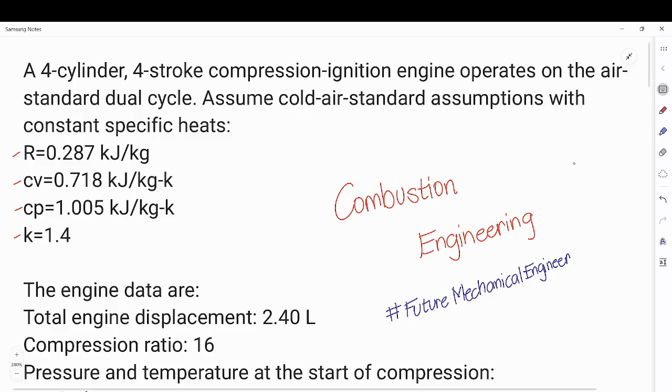Okay. So we have a four-cylinder, four-stroke. So the engine data are we have here the total engine displacement 2.4 liters. And the compression ratio RK, this is our RK, 16. Pressure and temperature at the start of the compression, we have here our P1, which is 95 kilopascal, and our T1 is 35 degrees Celsius.

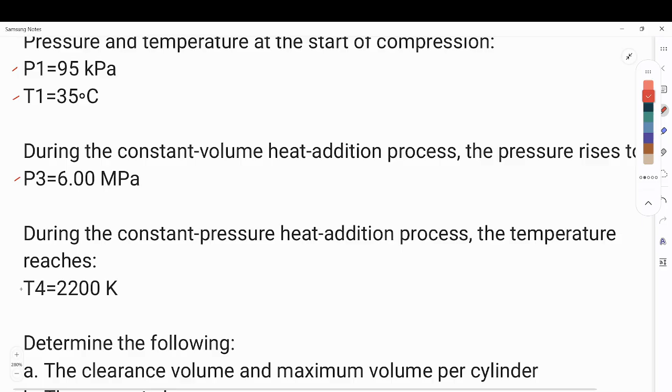And then, during the constant volume heat addition process, the pressure rises to P3, 6 megapascal. And then, during the constant pressure heat addition process, the temperature reaches our T4, which is 2,200 Kelvin. Okay, now that we have our data, basahin natin anong hinahanap. Hinahanap po dyan lahat. We are asked to determine the following.

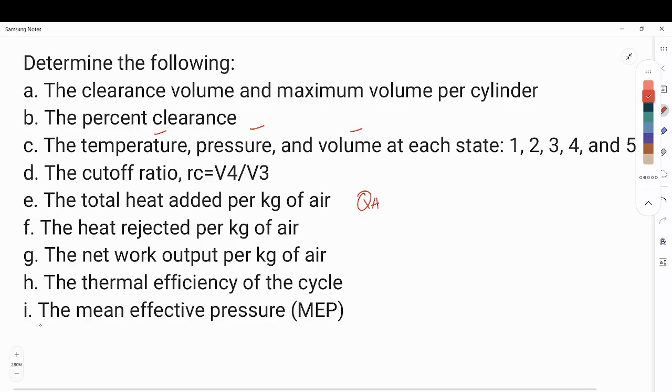A, the clearance volume and the maximum volume per cylinder. And B, the percent clearance. C, the temperature, pressure, and volume at each state. Then we are also asked to find the cutoff ratio, V4 over V3. Then E is the total heat added per kilogram of air, which is our QA. And then we have the heat rejected per kilogram of air. G is the net work output per kilogram of air. H is the thermal efficiency of the cycle. And then finally, letter I is the mean effective pressure or the MEP.

Okay, so let's start answering this problem. And the first step in answering any problem is to write down our given data. So what are we given? Anong meron tayo? So again, it is stated we have a four-cylinder. Meron daw tayong makina, compression ignition engine. Apat yung cylinder niya. So it is also said that it is a four-stroke. So one cycle requires 4 strokes.

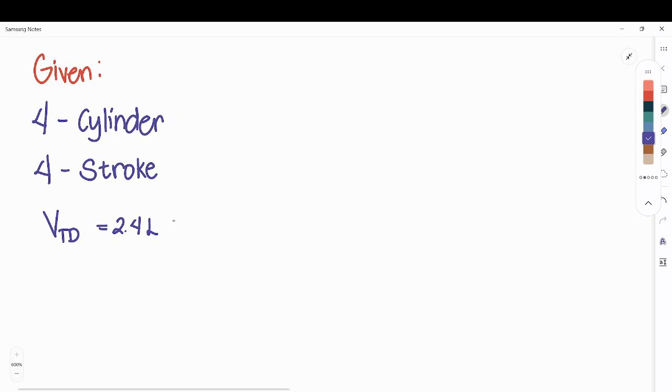And then may binigay po doon na volume displacement, which in this case is the total volume displaced. Kasi sa apat na cylinder na yon, may bawat cylinder may volume na nadi-displace, and pag kinombine mo yung displaced volume na bawat cylinder, you will arrive with 2.4 liters. Or in cubic meters, just divide that by 1,000. So that will be 0.0024 cubic meters. And then we also have our compression ratio RK is 16.

Our P1 is 95 kilopascal. Our temperature 1 is 35 degrees Celsius. And then just make it to Kelvin, 308 Kelvin. And then our T4. Anong T4 natin? T4 is equal to 2,200 Kelvin. And then may binigay ding P3, which is 6 megapascal, or gawin na natin kilopascal for unit uniformity. So, yan yung mga given natin.

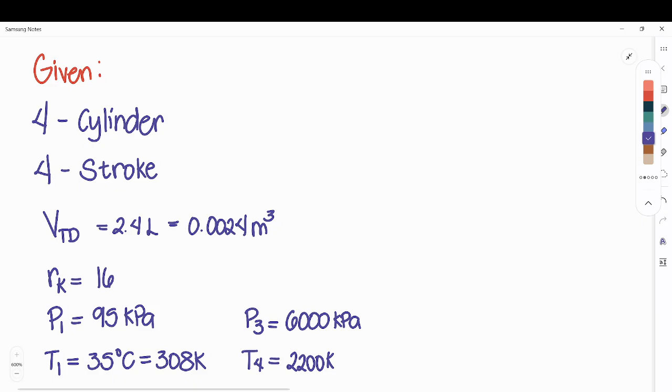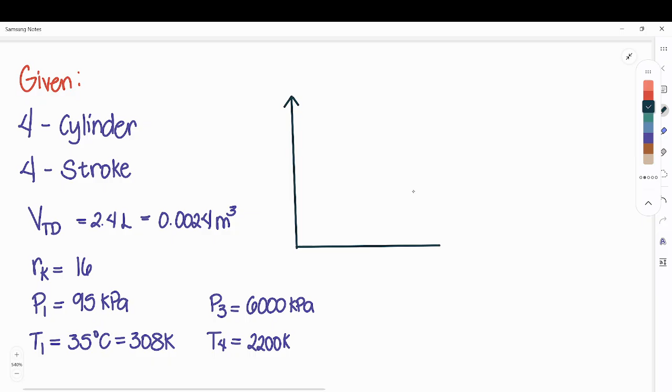And our cycle, again, is a dual cycle. So, ano nga ba ang dual cycle? Let's just recall. In order to solve this problem, you must have a comprehensive understanding of the dual cycle. So, para hindi ka maligaw, before solving a cycle problem, you can draw its PV diagram kasi doon mas madaling ma-visualize yung nangyayari sa bawat parts. So, let's draw. Sa dual cycle, we have an isentropic compression and then isometric heat addition. Tapos may isa pa siyang heat addition which is isobaric. And then it further expands to an isentropic expansion. Tapos isometric heat rejection.

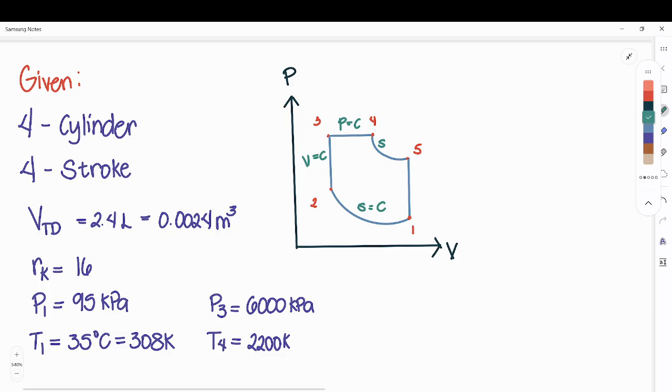So, this is your point 1. Here is your point 2. Dito naman is point 3. Dito is point 4. And dito is point 5. Again, isentropic compression, your entropy is constant. Dito naman your volume is constant. From process 3 to 4, your pressure is constant. And then 4 to 5, again, entropy is constant. And finally, 5 to 1, your volume is constant kasi isometric heat rejection.

Tapos, para hindi ka malito, i-drawing mo na din na from 1 to 2, anong ratio ang mahalaga dyan? You have here your compression ratio RK. Next, from 2 to 3, your important ratio is RP. And from 3 to 4, ang mahalaga dyan is si cutoff ratio. Para hindi ka maligaw kung saan makukuha yung ratio if pinapahanap or gusto mong gamitin.

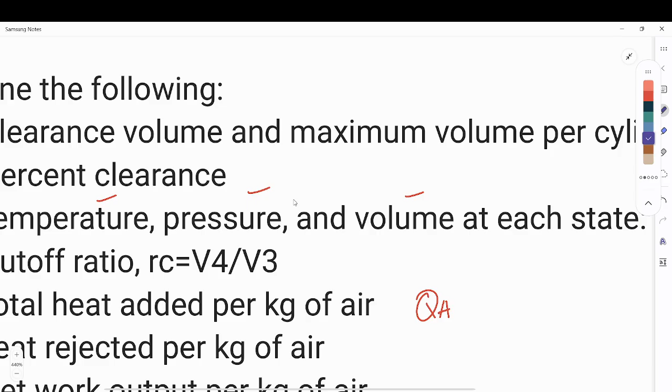So, let's proceed. First, pinapahanap dito is the clearance volume and the maximum volume per cylinder. So, the clearance volume is the smallest volume formed in the cylinder. At sinabi pala doon, saan yun?

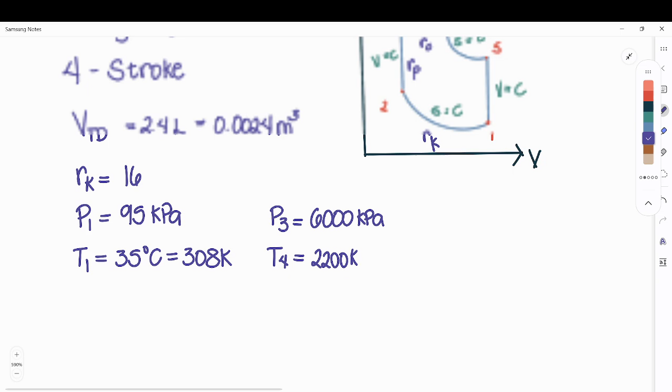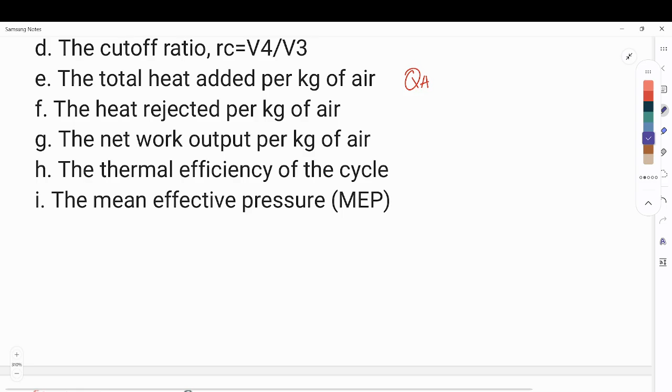Clearance volume and maximum volume per cylinder. So, per cylinder ang hinahanap. Take note of that. Ang given sa atin ay total. We're given the total volume displacement sa buong engine.

So, para makuha natin yung per cylinder, we can say that the total displaced volume is equal to the number of cylinder times the volume displaced per cylinder. So, hinahanap natin si VD per cylinder or the volume swept per cylinder. So, madali lang, divide mo lang yung total ng number of cylinder. So, your volume displaced per cylinder is the total over the number of cylinder.

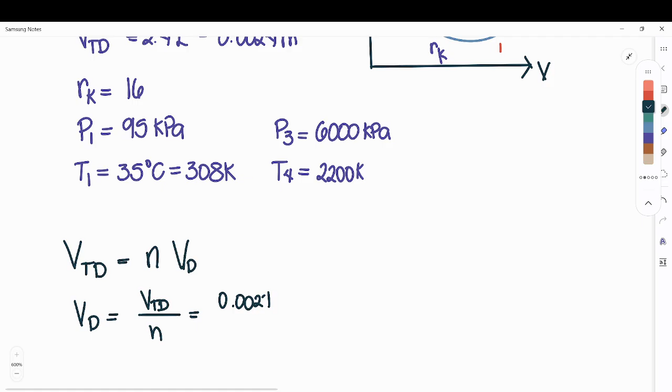So, 0.0024 cubic meters over, again, we have a 4-cylinder engine. 4 yung cylinder ng engine natin. So, pag dinivide natin yan by 4, you'll have 0.0006 cubic meters. Ano po yan, sir? Ano yung volume na yan? Again, that is the swept volume per cylinder.

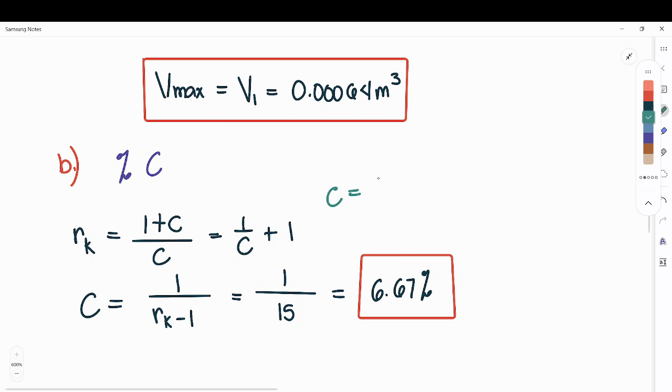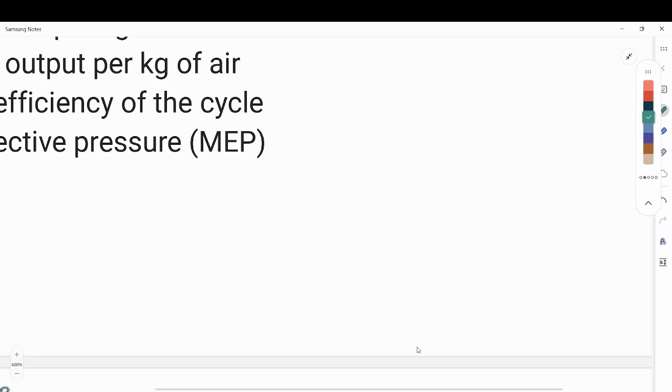Okay na tayo sa clearance. Percent clearance. Okay. Pwede mo din kunin si percent clearance in terms of the volume clearance over the swept volume. Ganito. VC over VS. Yan. Dapat pareho sila ng answer. Okay. Now, let's proceed with anong sunod? Yan, ito na yung mahabang part. Pag nakuha natin si letter C, shoot na lahat yung D, E, F, G, H, I.

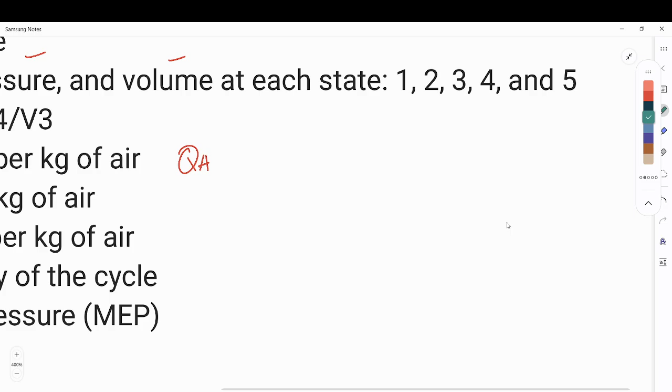Sa letter C, we're asked to find the temperature, pressure, and volume at each state. 1, 2, 3, 4, 5. Hanapin mo yung volume, pressure, at temperature sa 5 states or points na yon. So, let's proceed. Gawin natin si letter C. PVT at each state. P, V, and T. So, maganda dito para hindi ka mahirapan at organized yung solution mo. Ang ginagawa ko, you find the PVT for each process. 1 to 2, 2 to 3, and so on and so forth.

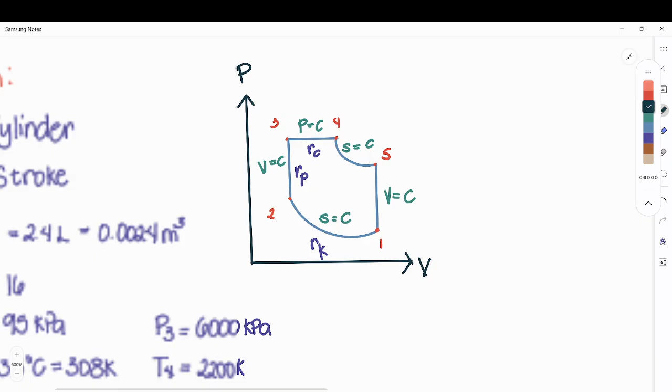So, simply, substitute your values. Our T1 is equal to 308 Kelvin and our compression ratio is 16. So, salpak. 308 Kelvin times 16 raised to, our K is 1.4, so minus 1, this will become 0.4. Okay. So, our T2 is equal to, press that to your calculator, you will have 933.6814 Kelvin.

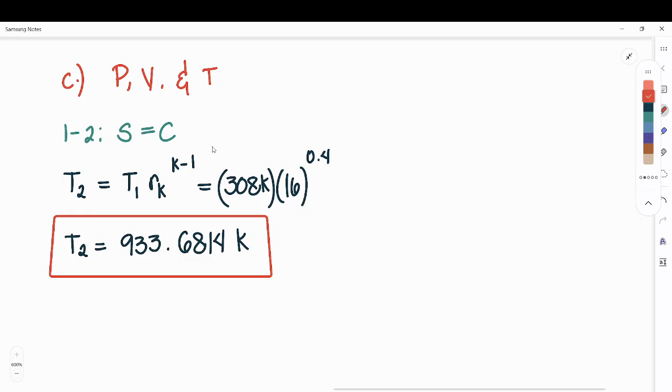So, ang gawin nyo, once you arrive with temperature, store nyo na sa calculator nyo kasi this will be very helpful. It's very important when we solve for the heat rejection, the heat added, and the work net. So, store mo na yan sa calculator mo sa mga letters, para hindi ka malito. Kayo nang bahala kung saan letter. Basta nakastore yan. Okay, so let's proceed with solving for the P2. Kasi we are given P1.

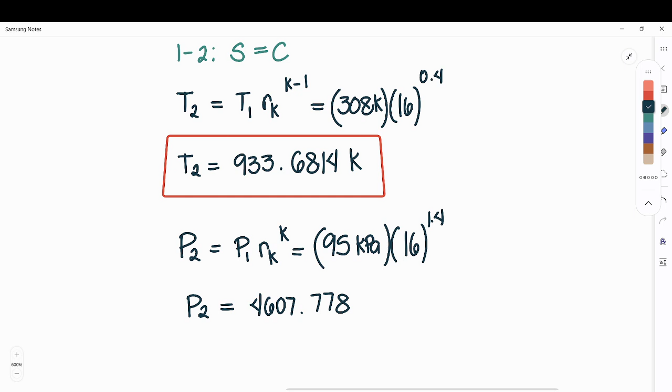So, relationship naman ng P2 is simply P1 times RK raised to K. Kasi inversely proportional yung volume at pressure. So, anong P1 natin? 95 kilopascal. Salpak lang. 95 kilopascal times our compression ratio 16 raised to 1.4. So, our P2, pag pinindot sa calcu, ingat sa pagpindot, you'll have 4607.7784 kilopascal. Again, this is your P2. Pwedeng i-store mo na to ulit kasi baka kailangan mong gamitin.

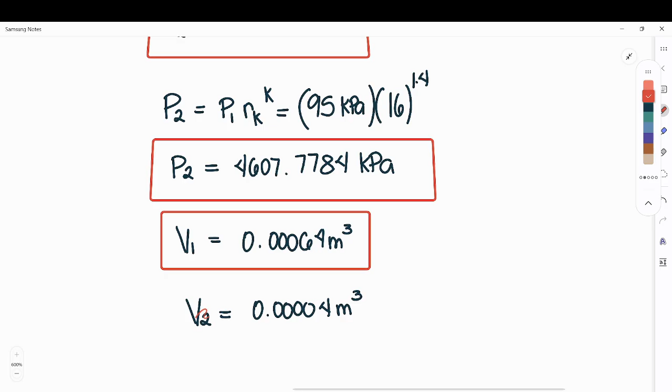Okay. So, meron na tayong pressure, temperature, and yung V1 nakuha na natin. Diba our V1 is the maximum volume na nakuha natin kanina, which is 0.00064 cubic meters. This is our volume 1. Ay, kailangan natin ng volume 2. Ang volume 2 naman is our minimum volume, yung nakuha natin, 0.00004 cubic meters. Okay na tayo sa process 1 to 2. Nakuha na natin yung dapat kunin. So, let's proceed with the next process.

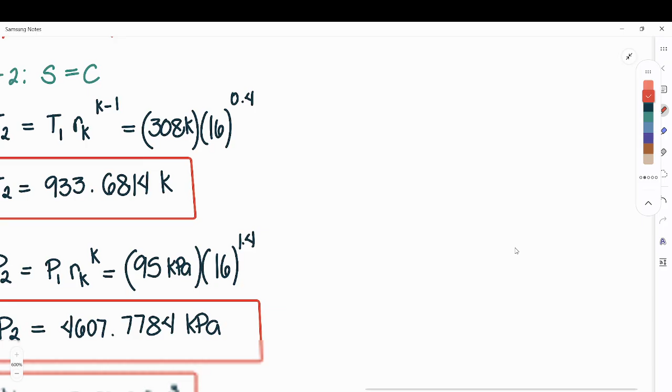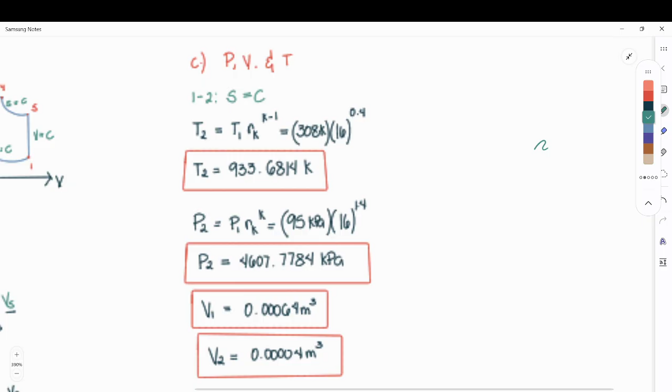Anong sunod na process? Process 2 to 3. Let's just move this aside. Ano nga yung process 2 to 3? Para hindi ka malito, balikan mo yung dinadrawing mong PV diagram. Process 2 to 3 is isometric. This is a constant volume heat addition process, meaning your volume is constant. Ano yung mga relationships ng PVT kapag volume is constant? T3 over T2 is equal to P3 over P2. So, we can solve for T3.

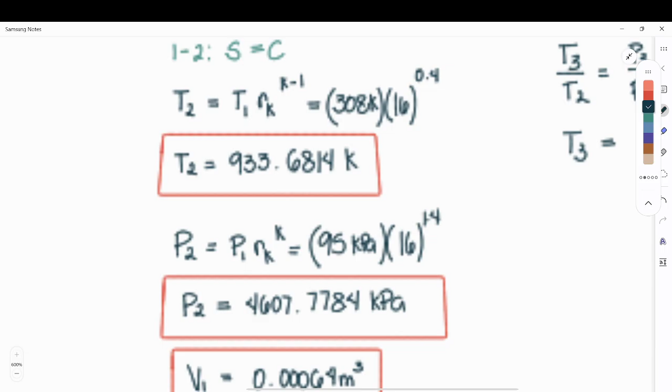Kasi, may given ditong P3. Ito, 6,000 kilopascal. Okay. So, we can solve for that kasi may P2 tayo. Ang nawawala lang is T3. So, rearranging this, we will have T2 times P3 over P2. Yan na yung ating T3. So, this is just a matter of substitution. Substitute lang natin yung given values natin.

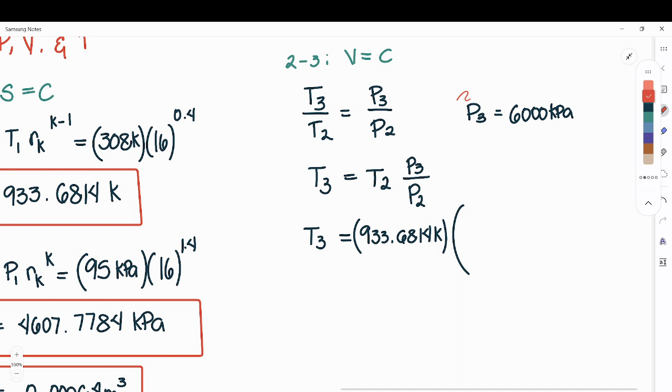Our T2, ano yung nakuha nating T2? T2 is equal to 933.6814 Kelvin times our P3. Our P3, given yung P3, which is your 6,000 kilopascal. Baksan natin para hindi tayo malito. So, 6,000 over your P2. Your pressure 2 is 4607. Dapat stored values tayo for a more accurate solution. So, pag pinindot yan sa calculator, matitira si Kelvin.

T3 is equal to, pindot, 1215.7895 Kelvin. Okay, meron na tayong T3. Madali lang si combustion. It's just a matter of following the right processes.

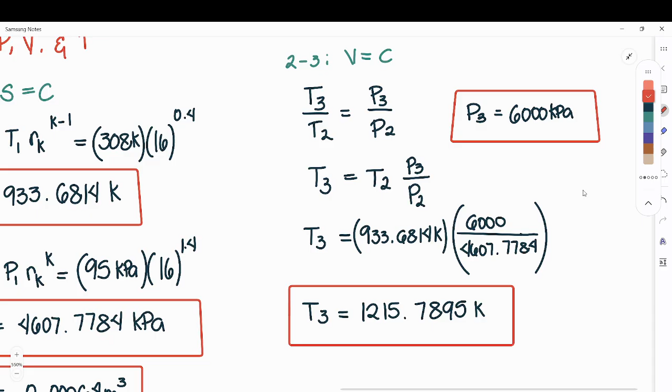Okay, meron na tayong T3, meron na tayong P3. Si V3, paano natin siya kukunin? Based from the process, it's a constant volume heat addition. Meaning, your V2 is yung V3 mo na rin. Diba? Dali lang. Your V2 is also your V3, which is equal to your minimum volume na 0.00016 cubic meters. Okay, meron na tayo sa process 2 to 3. And then, let's proceed to the next process.

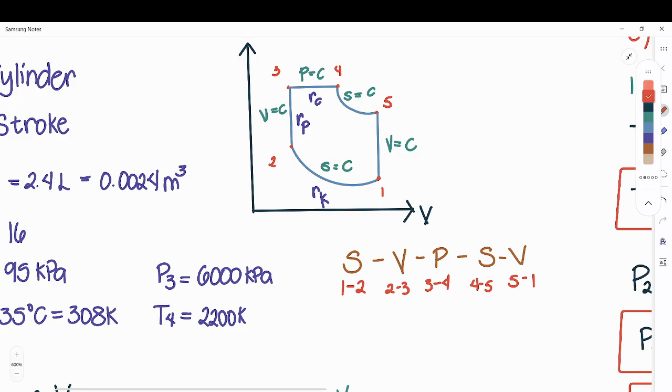Ano yung next process natin? Tapos na tayo sa 1 to 2, 2 to 3. So, punta tayo kay process 3 to 4. Tandaan natin for dual cycle, kayo bahala gumawa ng kwento nyo. Pero ang palatandaan ko dito ay sure vol. S 1 to 2, V is 2 to 3, P is 3 to 4, S is 4 to 5, and V is 5 to 1. Sure vol, pressure vol, or surely beautiful. Alright.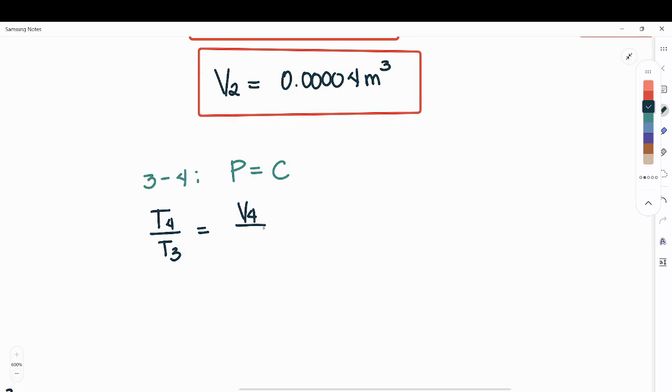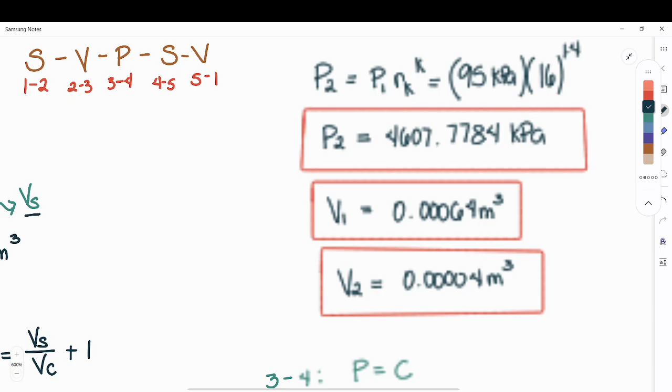So, our process 3 to 4 is isobaric, constant pressure. Lagay nyo dyan para hindi ka malito. Kapag constant pressure, your volume and temperature are directly proportional. This is V4 over V3. Meron tayong given T4, 2200 Kelvin. Our T4 is equal to 2,200 Kelvin, box mo na agad yan kasi hinahanap yan sa problem, although given.

So, we are looking for V4. V4 will become V3 times T4 over T3. And again, it's a matter of substitution. Our V3 is also equal to our V2, which is 0.00004 cubic meters. Our T4 is given, 2,200 Kelvin, all over our temperature 3, nakuha natin kanina, dapat naka-shift store yan, 1215.7895.

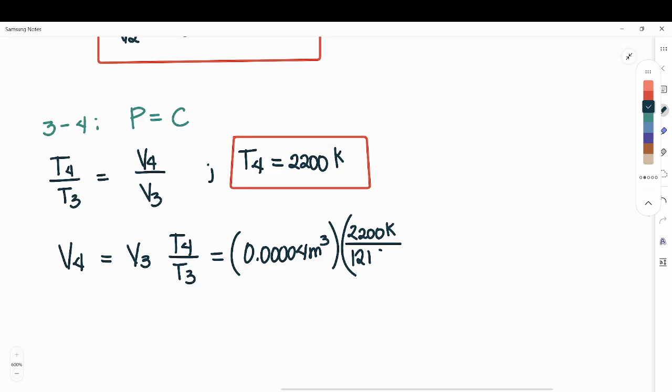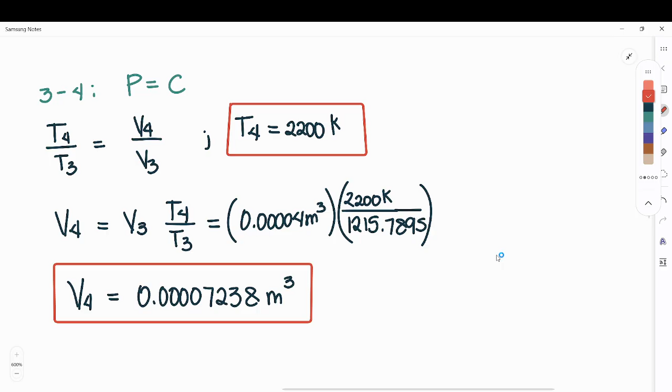Pag pinindot natin sa calculator, V4 is equal to 0.00007238 cubic meters. Shift store nyo na ulit yan kasi magiging useful mamaya. And then, ano yung pressure natin? Since this is an isobaric process, constant pressure heat addition, your P4 is also your P3, which is equal to 6,000 kilopascal. And this is the maximum pressure in this cycle.

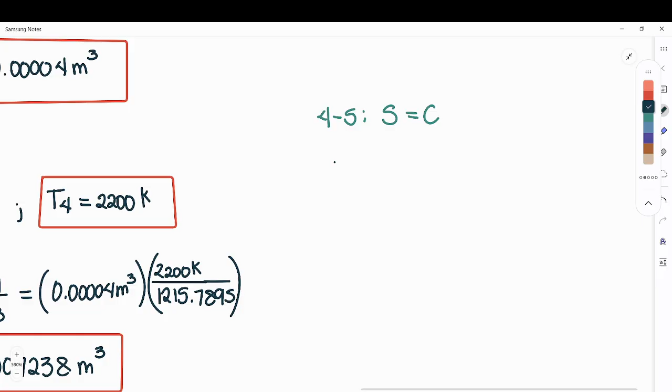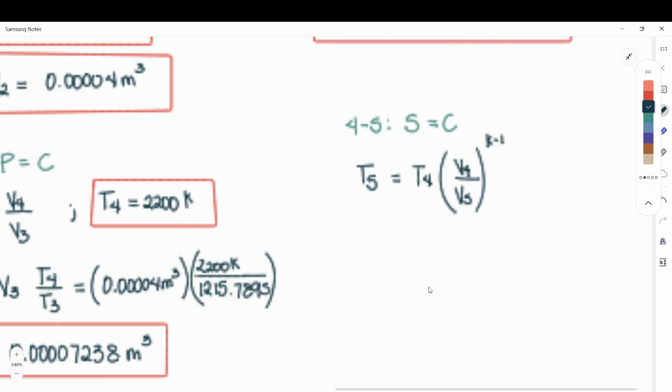Meron naman tayong V1, meron tayong V4, meron din tayong T4. Makukuha na natin si T5. So, substituting, our T4 is 2200 Kelvin. Our V4, yung nakuha natin kanina, 0.00007238, dapat nakastore. Then, our V1 is the maximum volume, 0.00064. Tama ba? Ano nga yung V1 natin? Where is it?

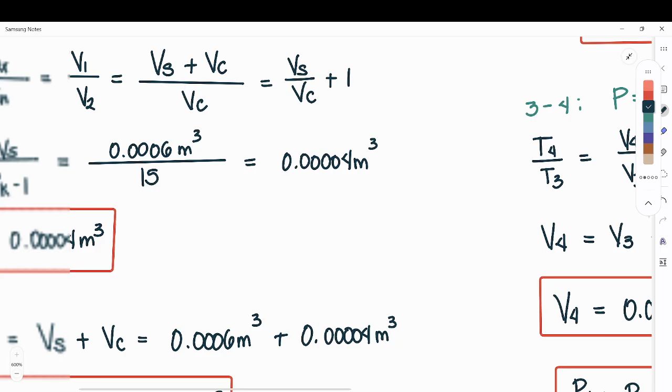Tatlong 0 pala yun siya. Ingatan nyo. 0.00064. Tama ba? Tatlong 0 yun?

Yeah, tatlo, okay. So raised to k minus 1, this will become 0.4 kasi 1.4 minus 1. So pressing that into your calculator, you will arrive with, what's the answer? 2200 times, yan yung volume natin, raised to 0.4, this will become 920.0267. Again, all values must be stored.

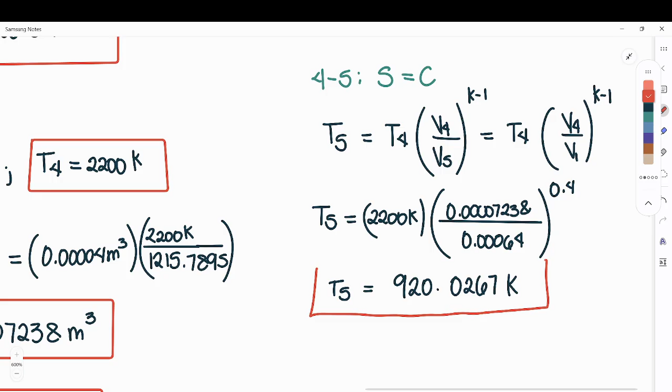This is Kelvin. Tapos meron na tayong V5 kasi nga it's also equal to our V1, which is the maximum volume. So sulat na natin, our V1, V5 pala is equal to V1, which is 0.00064. Tapos wala na lang is pressure 5.

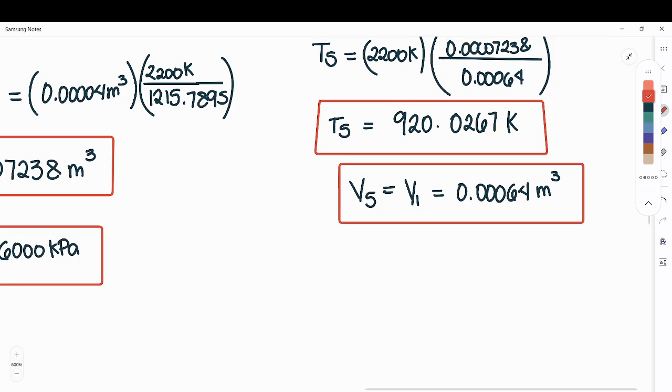Tapos shoot na tayo sa letter C. Makukuha na natin lahat, okay, let's proceed. So the relationship naman ng pressure and the volume kapag isentropic is ganito lang.

Yung P5 over P4 is equal to V4 over V5 raised to K. So ayusin natin, itaas na natin yung P4 para diretso na. So P5 is equal to P4 times V4 over V5 raised to K lang.

Yeah, so substitute lang ulit. So our P5, ang P4 natin is, ano yung P4 natin? Where's our P4 is equal to our P3 na 6,000. So pindutin natin 6,000 kilopascal.

Okay, our V4 is yung mahaba na may 7238, lang 0 yun, 4, 0 point, check natin. Yeah, 7238 over our V5 na equal sa V1, 0.00064

raised to K lang, kasi pressure at volume yan. So P5, pag pinindot, is equal to 283.7745 kilo Pascal. Yeah, okay na tayo.

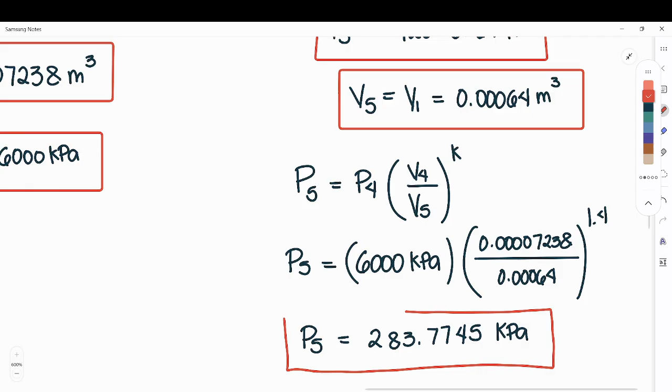Nakuha na natin lahat ng pressure. Yan, triangle - lahat ng pressure, volume, and temperature. Mag-box. Wait, pressure, volume, and temperature for each state, each point, points 1, 2, 3, 4, 5. Okay, ngayon nakuha na natin yan. What's next? Okay na tayo dito sa letter C. Okay na tayo dito, dito, and dito.

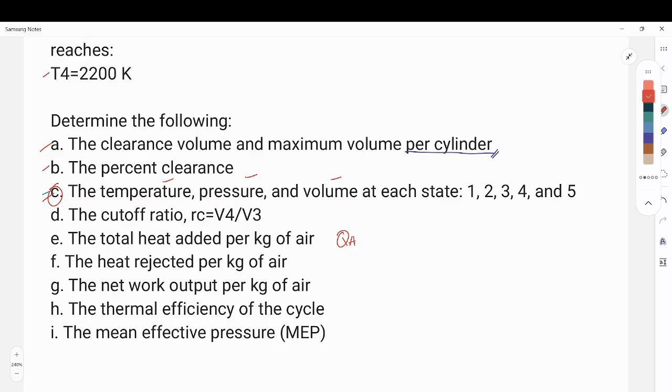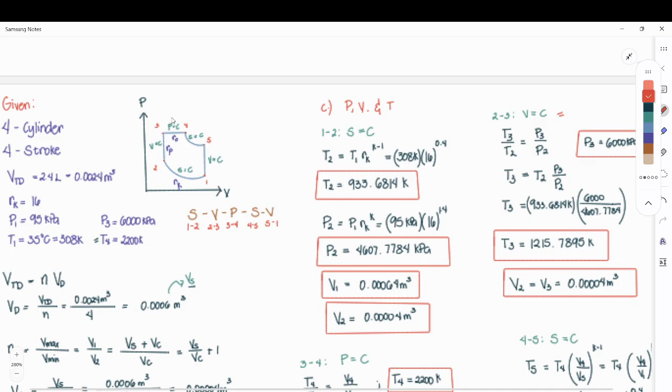Then next is the cutoff ratio, V4 over V3. Kayo na ang bahalang kumuha ng cutoff ratio. Madali lang yan, kasi it's simply V4 over V3. Dito lang yun, here, sa points 3 to 4, dito mo kukunin yung cutoff ratio. So you can handle that, just divide yung nakuha nating V4 sa V3.

V3 nating nakuha. So this will become 0.00007238 divide 0.00004 cubic meters. So yun yung RC natin.

So next pala, we need to find the total heat added per kilogram of air. So let's proceed with solving for the total heat added. Okay, the total heat added. Let's solve for the total heat added.

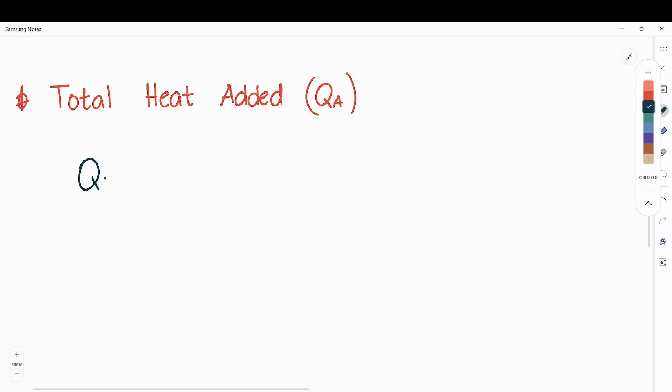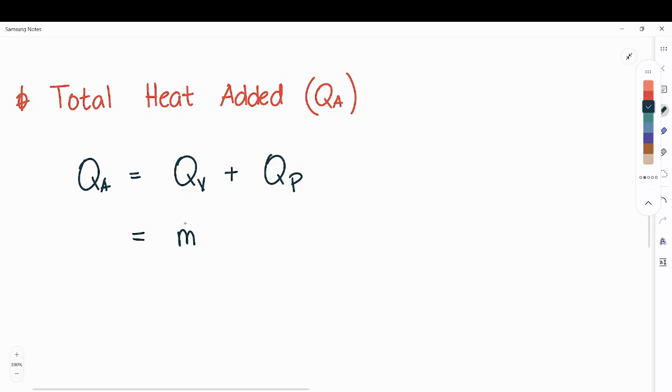QA. Okay, what is the formula for the total heat added? Again, for a dual cycle, dalawa yung nagiging heat addition process natin, which is an isometric heat addition and isobaric heat addition. So simply add lang natin. So our QA is yung heat addition sa constant volume plus heat addition sa constant pressure.

So this will become, ay, nakalagay pala doon, per kilogram ba yun? Yeah, per kilogram of air. So yung maliit na q. So we're looking for our QA, heat added sa constant volume plus heat added sa constant pressure. So this will become CV

sa nangyari tong constant volume heat addition sa process 2 to 3. So this is T3 minus T2 plus heat addition sa isobaric process. So this will become CP naman. Yeah, at yung nangyari yung heat addition na isobaric sa 3 to 4. So this will become T4 minus T3.

So okay na, salpakan na lang ng salpak once na nakuha mo yung PVT sa bawat point. So mahalagang unahin mo yon. So again, our CV is 0.718 kilojoules per kilogram

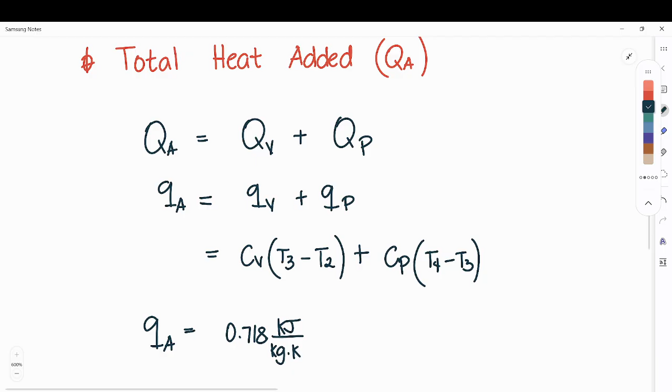Kelvin times our T3. Ano yung T3 natin? Our T3 is 1215.7895, minus our T2 naman is 933.6814, nga ba yun? Yeah, 933.6814 Kelvin

plus CP, which is 1.005 kilojoules per kilogram Kelvin, and T4 natin is yung given 2,200 minus T3, yung ito 1215, 1215.7895. Okay, this is in Kelvin. So cancel yung Kelvin, we'll be left with kilojoules per kilogram, and pressing that into your calculator, mga kasama, your QA in kilojoules per kilogram is equal to 1191.6852 kilojoules per kilogram. Okay.

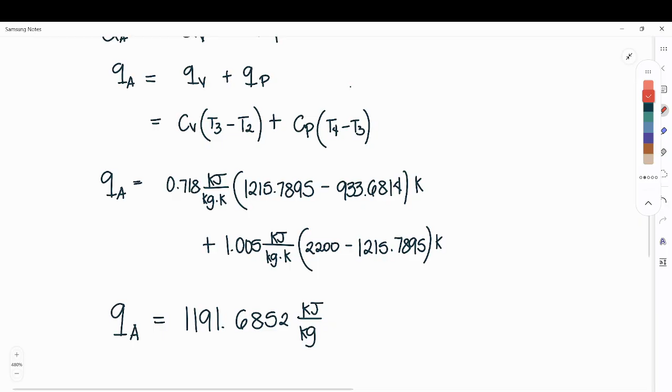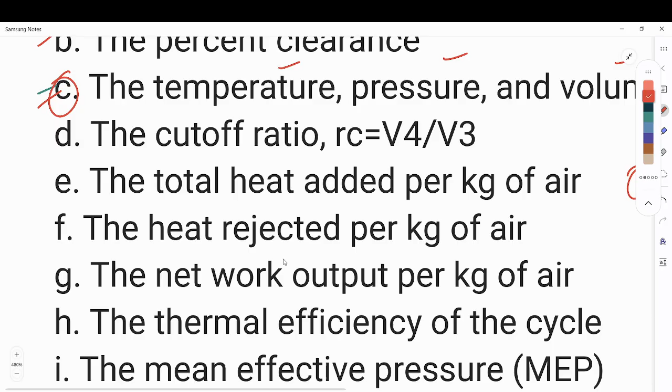Next, pinapahanap din doon yung heat rejected per kilogram of air as well. Hanapin din natin, tama ba? Yeah, total, the heat rejected per kilogram of air. Then next natin is g, work net output. Then sunod na, okay, let's solve for the heat rejected. Heat rejected.

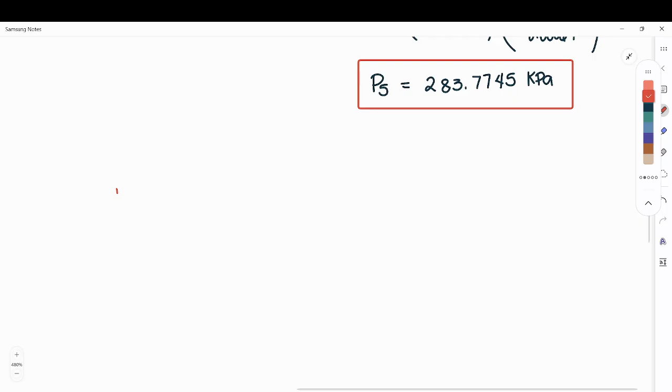QR, again, per unit mass. So, let's just plug in the values. Our QR is equal to heat rejection sa dual cycle, which is constant volume. So, CV, that happens in process 5 to 1. So, this is T5 minus T1. Substituting your values, CV is 0.718 kilojoules per kilogram Kelvin times your T5. What is our T5 from earlier? 920.0267 minus our temperature 1, which is given, that is 308 Kelvin.

Okay, pressing that into your calculator, you get QR. Grabe, ang dami. So after pressing, you should have 439.4351. Again, this is in kilojoules per kilogram.

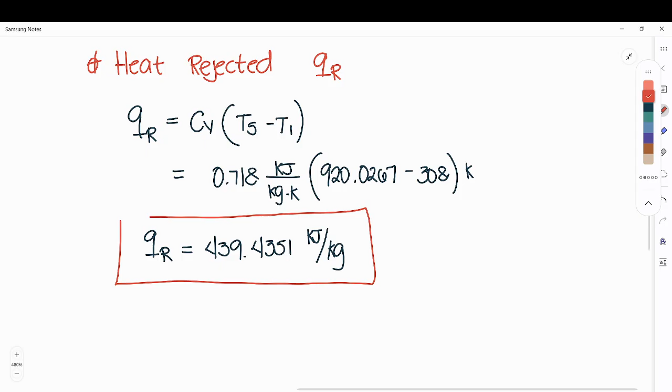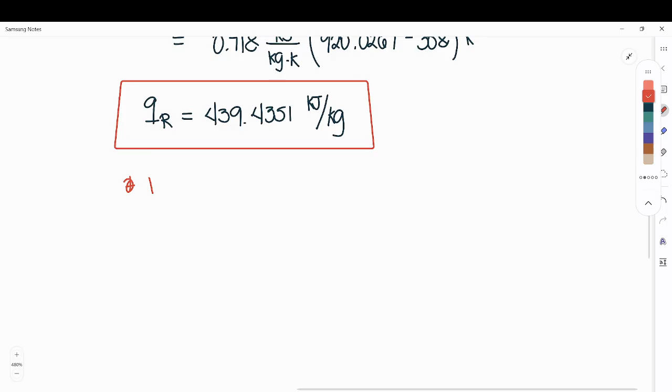Okay, next, what else do we need to find? Work net output per kilogram again. So basically, this is just the difference of your heat added and heat rejected. Make sure you've stored your QA and QR so we're good. So work net is simply the difference of your QA minus QR. Okay, so let's substitute.

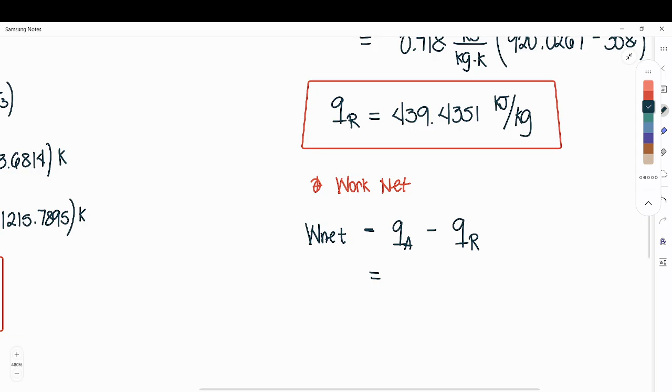1191.6852 minus 439.4351, both in kilojoules per kilogram. So your answer, after pressing minus, is equal to 752.25 kilojoules per kilogram. Okay, we're almost done.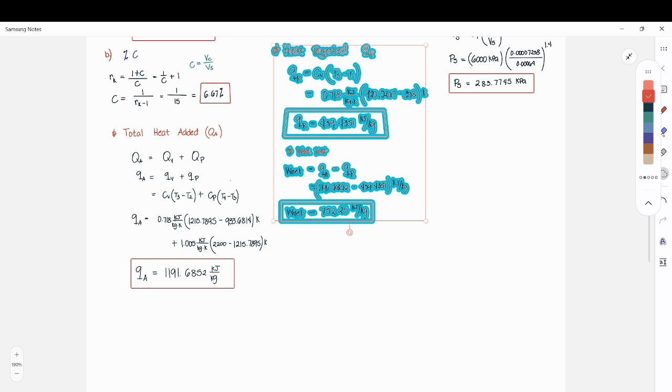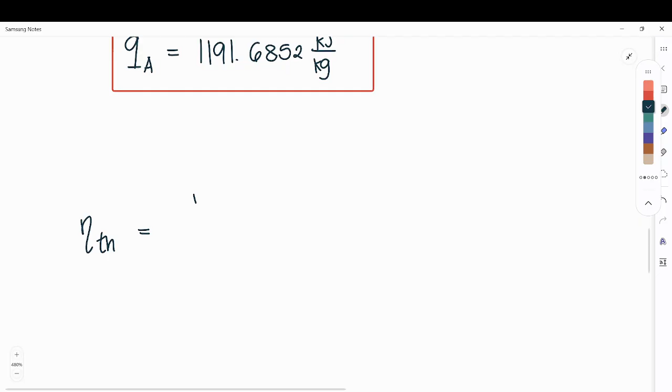Let's get thermal efficiency and mean effective pressure of the whole cycle. So how do we get the thermal efficiency? Again, from the general formula of our thermal efficiency, which is the output over input. The output is the work net and the input is the heat added. So basically, our thermal efficiency is equal to the output work net over the input heat added, QA.

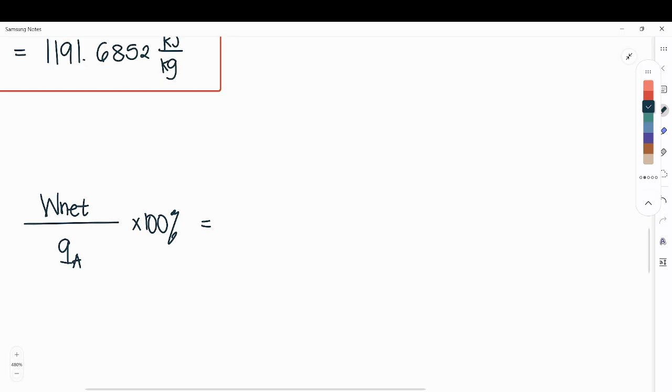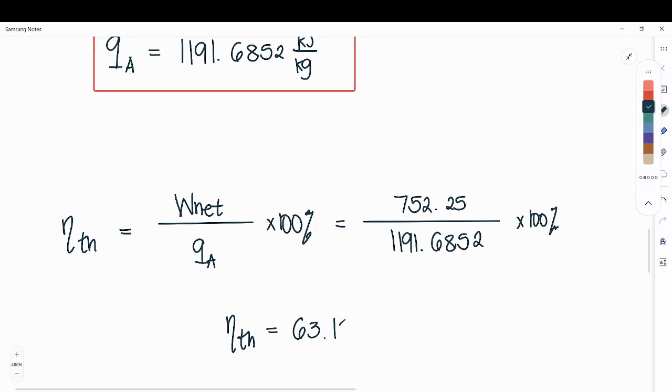Yeah, so this is times 100 percent. So our work net, what is that? 752.25, cancel the unit so we don't write it down. So 752.25 over 1191.6852 as QA, then times 100. Your thermal efficiency is approximately equal to 63.12%. Yay, almost done, ang dami.

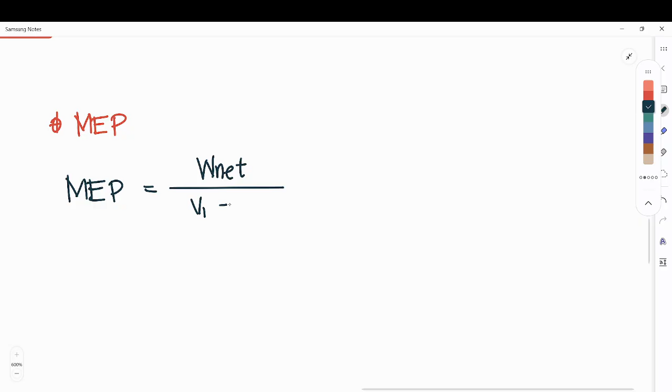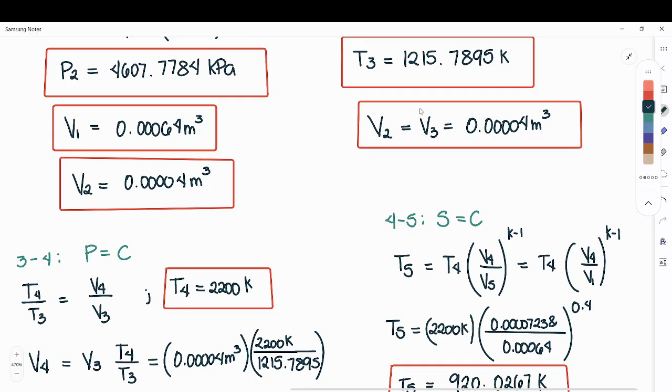Yeah, okay, mean effective pressure. Let me write it down. MEP na lang. Okay, the mean effective pressure. For our mean effective pressure, the mean effective pressure is simply the work net over the volume displaced, or simply V1 minus V2. But the volume we got here is not specific volume, while our work net is per unit mass. So when getting mean effective pressure, your numerator and denominator should be uniform.

It must be both per unit mass, or both as is without per unit mass. So since work net is per unit mass, volume should also be per unit mass. Or you could take the mass and multiply it to our work net. So what I'll do instead is get V1 per unit mass. Okay, so where do we get that? Just get it from here. PVRT. There, get this. It should be in state 1. V sub 1, P1. Yeah, so your specific volume 1 is RT1 over P1. So again, our R is

0.287 kilojoules per kilogram Kelvin. Don't be lazy to write the units, though it's fine either way. So T1 is 308 Kelvin. Okay, and then our P1, what's our P1? 95 kilopascal. So press it, you get 0.9305. That should be in cubic meters per kilogram.

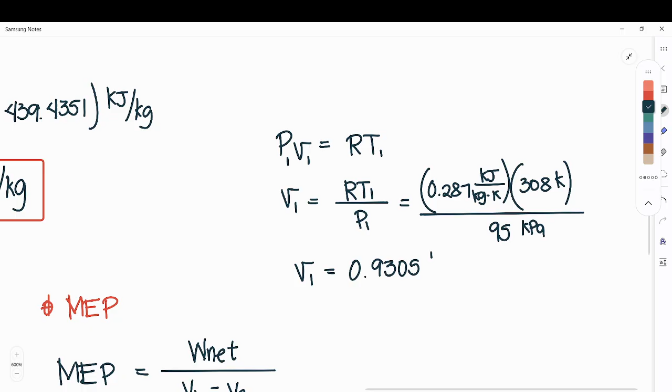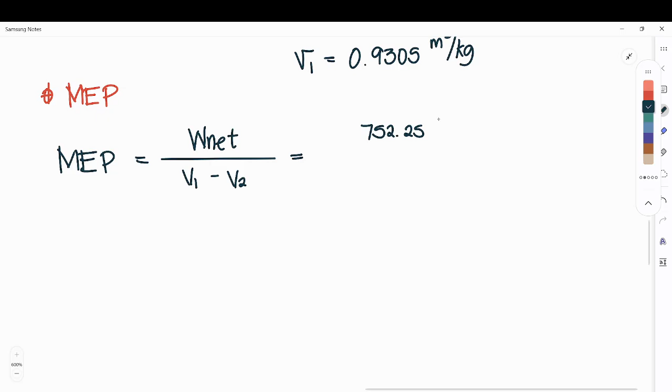Okay, so store that in whichever letter or variable. And then we can get it directly. Our work net is 752.25, this is kilojoules per kilogram, over 0.9305 cubic meters per kilogram. And we know that RK is equal to V1 over V2. So our V2 is simply equal to V1 over RK. So let's just plug in. Minus V2 equal to 0.9305 over 16, and this unit is cubic meters per kilogram. So cancel the kilogram, cancel the cubic meter, so we're left with kilonewton per square meter, which is kilopascal. And when you press that on the calculator, finally,

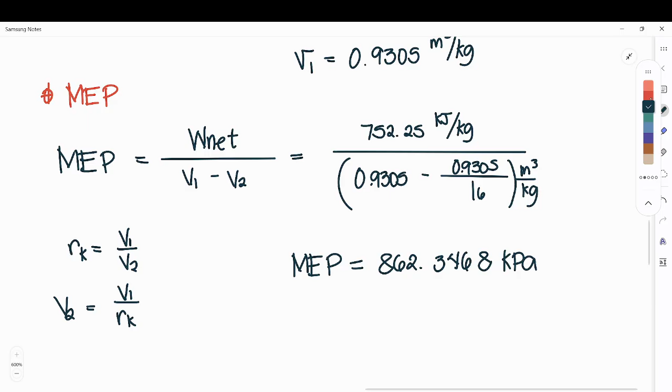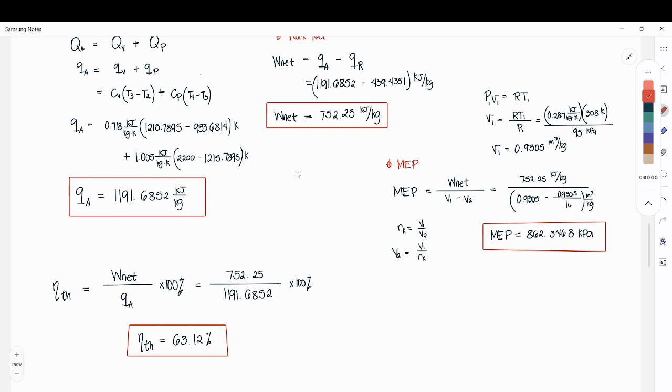862.3468 kilopascals. Okay, we've gotten everything asked for in this problem. Although it's a lot, it's worth answering because we covered everything we should know when solving problems regarding dual cycle. So I'll put this PDF in the comment section as a guide for solving this problem. Okay, that's all for this problem, and good luck, future mechanical engineer.